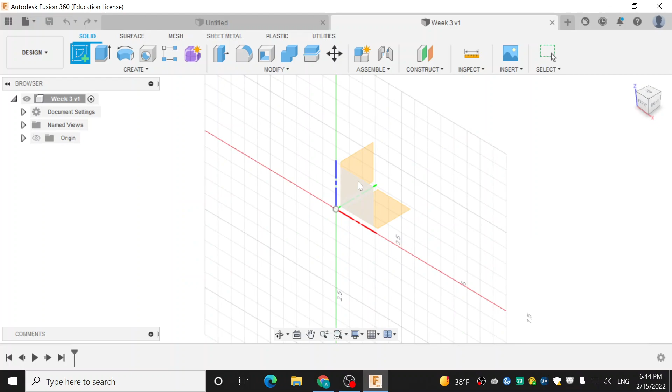I personally don't find that it makes too much of a difference where you start, but in terms of following with me, I'm going to choose the plane that's adjacent to the red and green axes.

So here—and slow me down if I'm going too fast. Just raise your hand or ask any of the training leads around you.

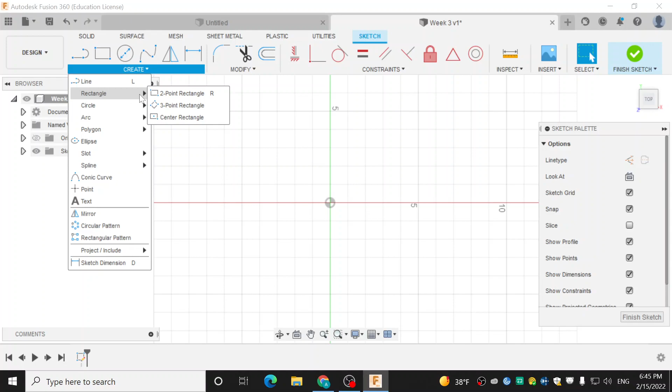So what I'm going to do now is go to the Create bar. I'm going to hit the drop down, go to Rectangle, and we have three different options for a rectangle. If we hover over them, it gives us a little description for what each one does, which can be useful in different projects depending on what you need or prefer.

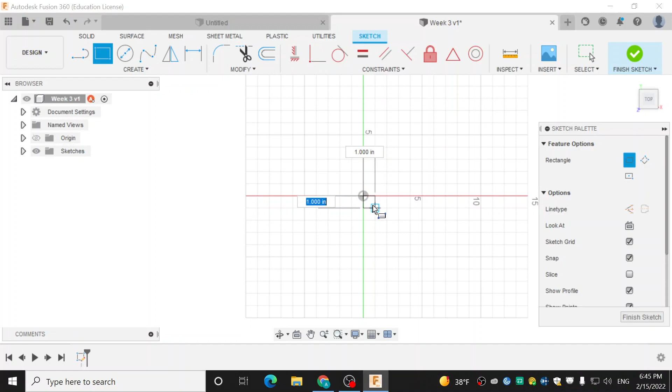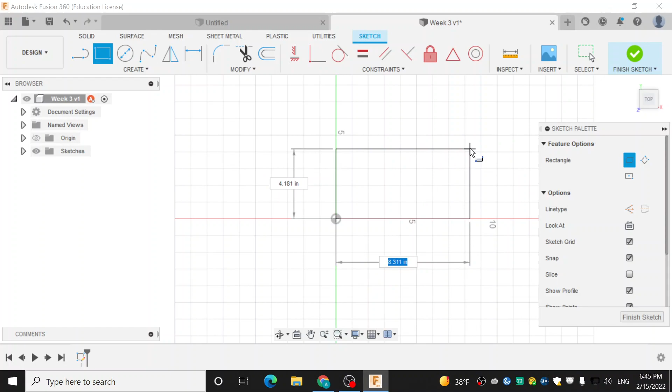I'm just going to do a 2-point rectangle, and go to the origin here. I'm going to place the first corner, and as you can see, we've got two different dimensions, a width and a length. Whatever my blue text is, that's the dimension I'm editing. So as you can see, we're editing the length now. I'm going to say that length should be 3 inches.

Oh, I forgot to mention this, but I will now. If you want to change your units, hit the drop down on Document Settings, hit Active Units, and if you're in millimeters, which I know some of you might be, you can switch to inches and set it as default if you prefer. Forgot to mention that, I apologize.

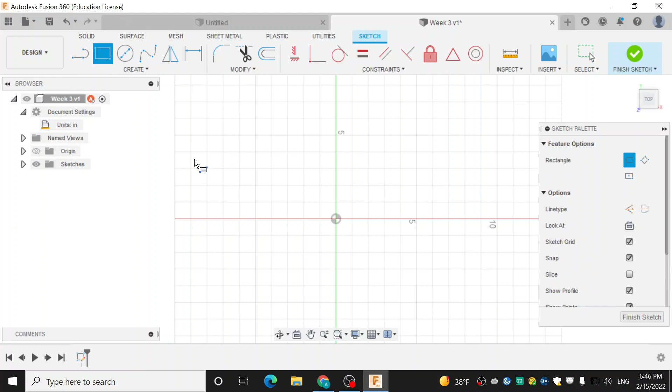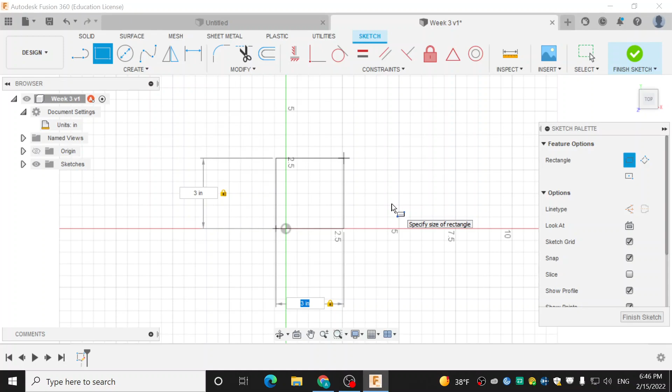Okay, so where were we? We're going to make our rectangle, a 3 inch by 3 inch square. You can tab over on your dimensions and it'll lock it in place. Once both of my dimensions are locked, I'm just going to hit enter, and it'll create a 3 inch by 3 inch square.

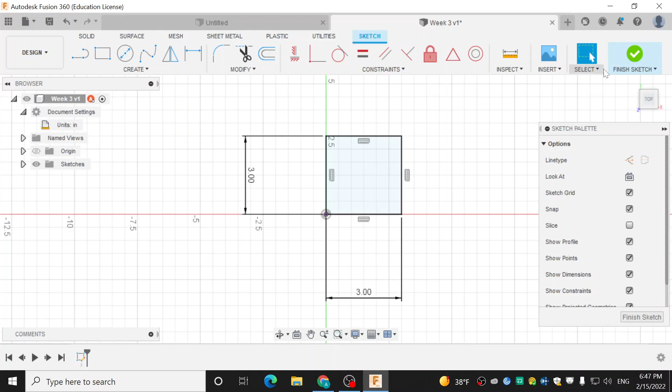All right, so now that that's done, I'm going to hit Finish Sketch, and get it to a position where I can extrude it with ease. You can use this little cube up here and turn it, or if you're on a mouse, hold shift and the middle mouse button to rotate it that way as well—whichever helps you control it best.

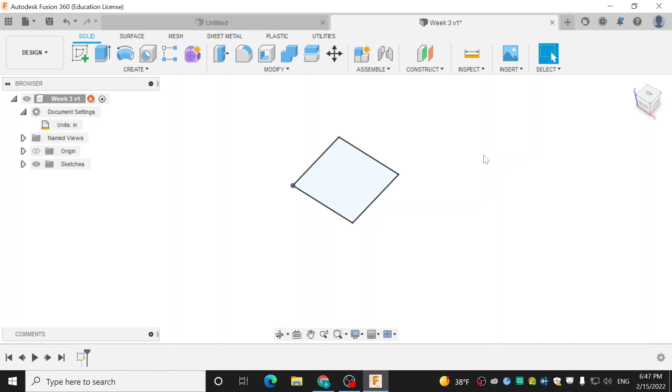So what I'm going to do is go back up to the Create tab and hit Extrude. As we can see, it gives us a little description for what it does—it's just going to allow us to give a third dimension to our sketch.

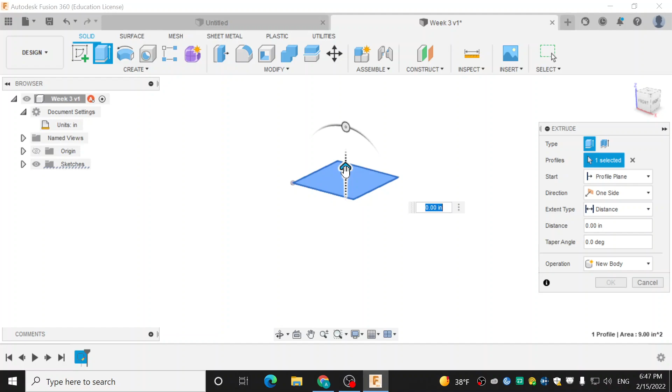So what I can do is drag my cube up or down, depending on where I want to extrude it. I'm going to drag this cube up 3 inches.

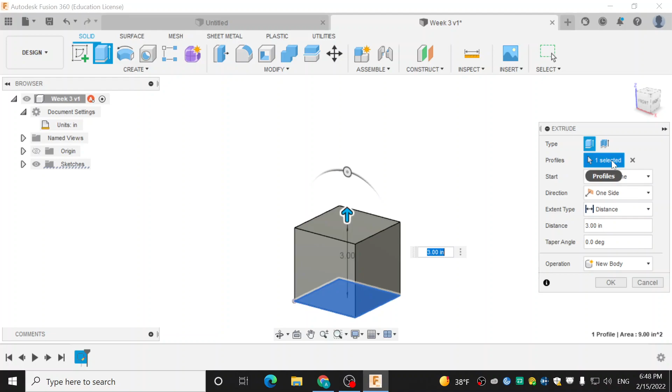For now, the default settings are fine. We're creating a new body, and everything looks good, so none of the default settings have to be changed. Once that's done, hit OK. Now we've got our nice cube.

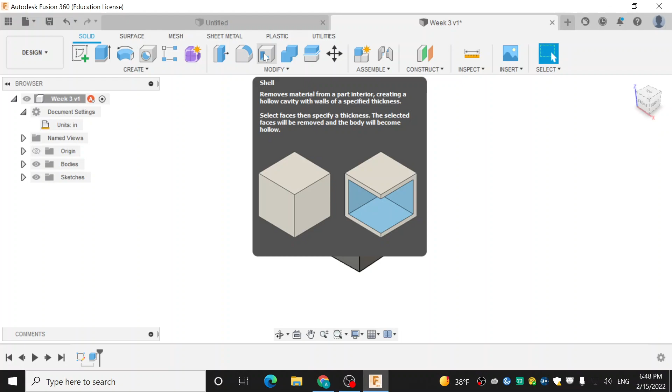So now we're going to go into one of the two tools we're going to learn today: shell. If we go up to the modify section of the toolbar, you can hover over the shell tool and get a description of what it does. It's going to hollow out our piece from any side that we give it.

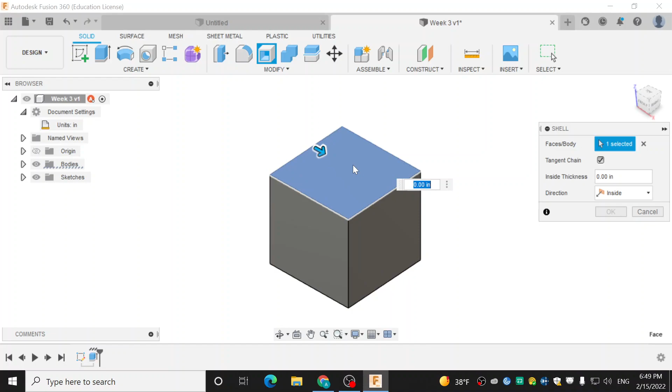We can hit shell and we're prompted by the program to give it a face, so I'm going to hit this top face up here. Now I can drag my arrow inwards or outwards and make the border around this cube thicker or thinner, depending on how I feel like.

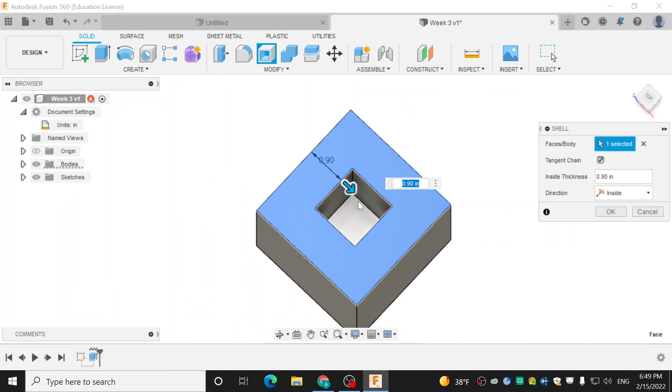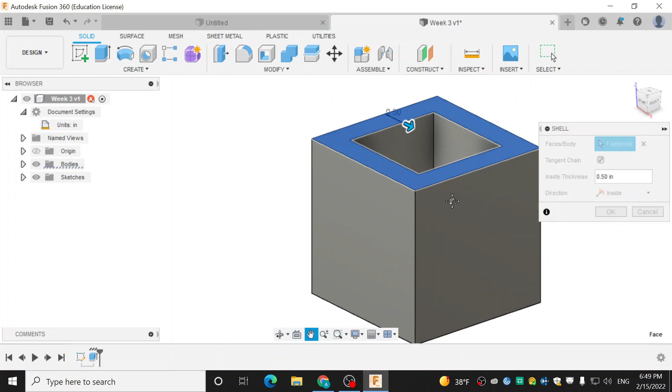If you zoom out, your units, which you can change, grow a little bigger. If you zoom in, the increments are a little smaller. So what I'm going to do is make this 0.5, and then I'm going to hit OK.

So if you ever have a part that you need to hollow out from one side, you'd use the shell tool.

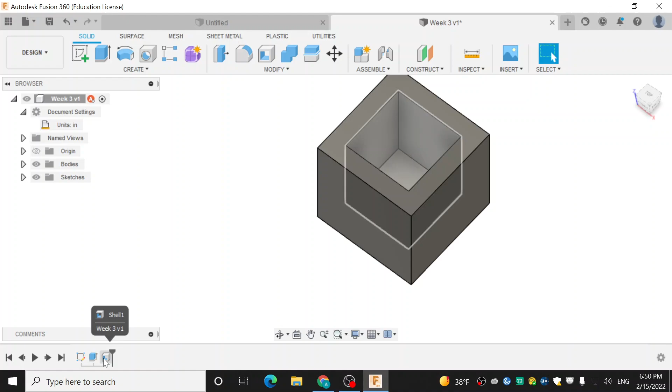And if you want to go back and change anything, you can go to the timeline on the bottom and double click the action that we did. If I want it to be 1 inch instead, I can change it there. So that's a useful thing to note.

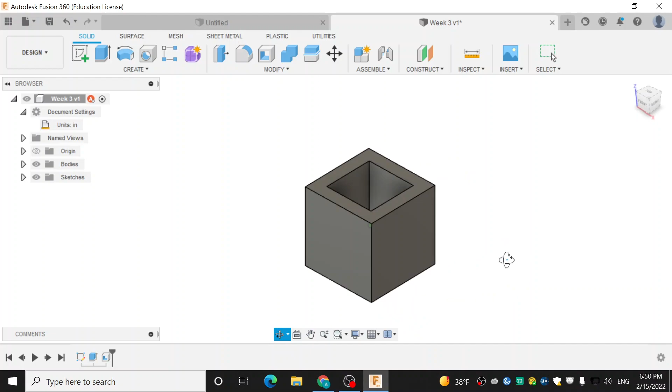So that's it for the shell tool. Now we're going to learn how to use the sweep tool. So flip your cube so that we can see the unshelled face on top.

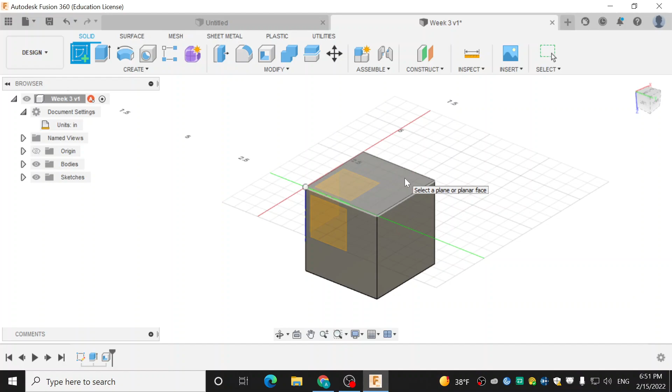We're going to be creating a new sketch on this face. So I'm going to go up to create, hit create sketch. I could choose one of these axes, but I'm just going to choose this face.

So I'm going to go up to the create section again, create a center diameter circle. If you hover over your face, you can see it snaps you to any one of the middle axes of this square face that we have. I'm going to try and find the center.

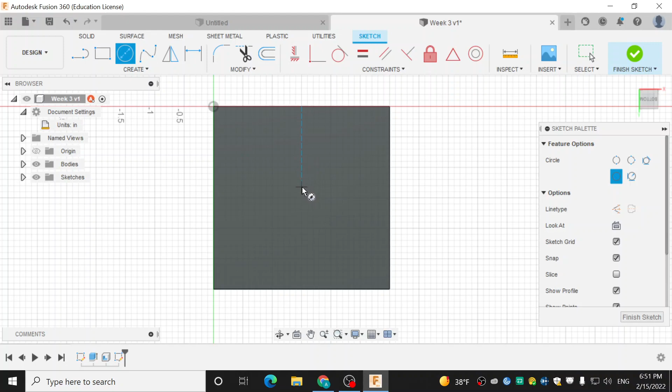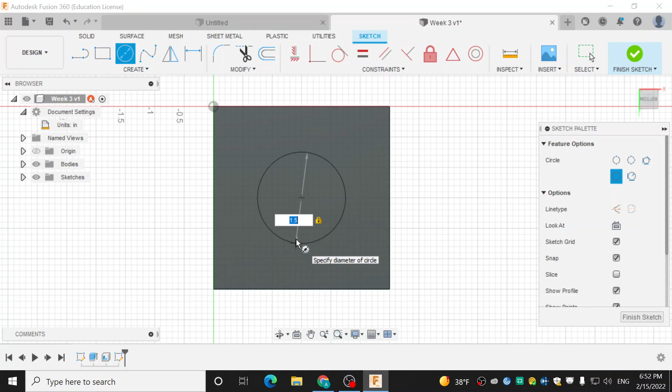Once you find your center, hit your center place point there, and we're going to make a circle, maybe 1.5 inches. My text was highlighted blue, so I can change that to whatever I want, and I can hit enter, and it'll create a circle of 1.5 inches in diameter.

So now once that's done, I'm going to hit finish sketch.

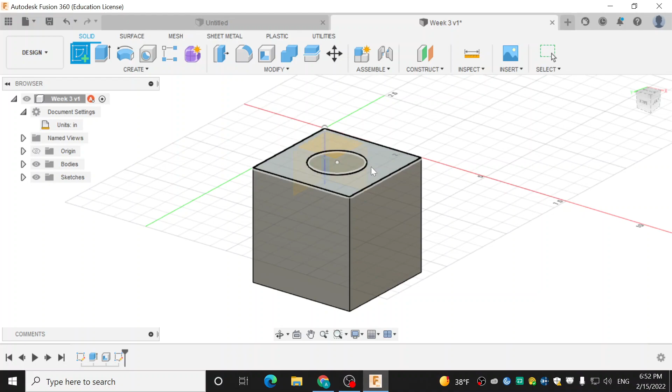Now I'm going to create a new sketch on any one of these sides that are perpendicular to the face of this circle. This is where we're going to create the line path for which the circle can sweep. Any one of these perpendicular sides works, so I'm going to choose this one.

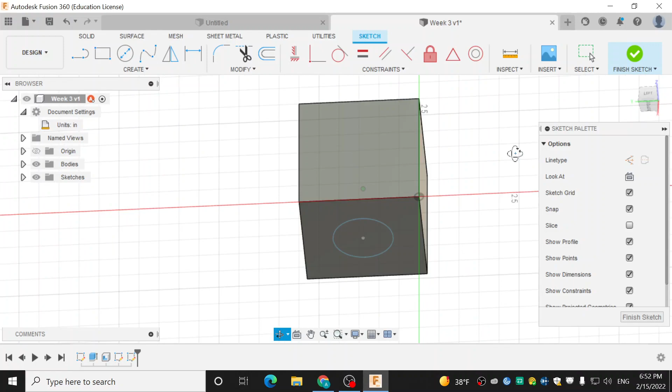We can move our view cube in the sketch too. I'm going to move it so I can better see what I'm doing. You can also hit any one of these designated sections on the view cube, and it'll automatically snap you to that point.

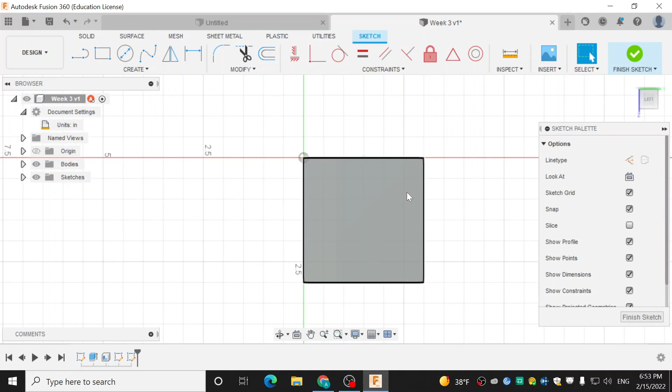What I want to do is make it so that the circle we had up here is on top, and we can highlight over it when we drag over this edge.

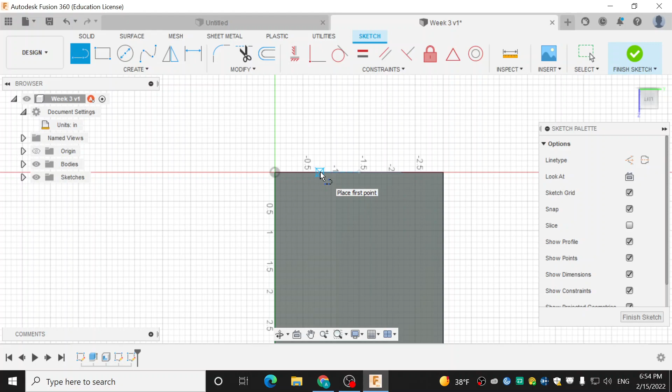So once we identify what side we want to work on, I'm going to go up to the create section and hit line. I am just going to draw some segments starting from any one of the edges here, and it'll automatically snap you to that point as designated by the blue box with the cross in the middle. Once I find that, I'm going to just start creating some segments.

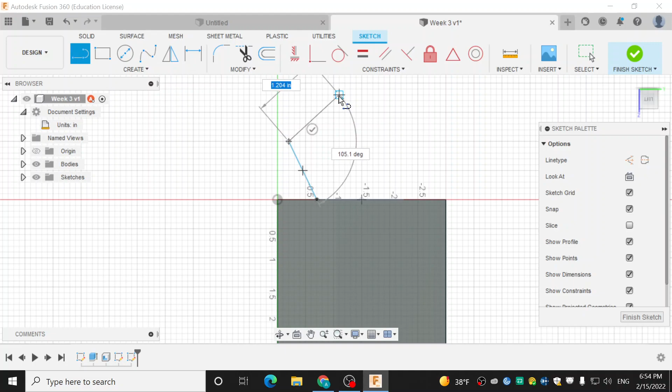So just creating some lines, and the idea here is that the circle that we had on top will follow this path that we have up here in our sweep. Once you have that final line drawn, you can hit escape, enter, and it'll finish that tool that you're using.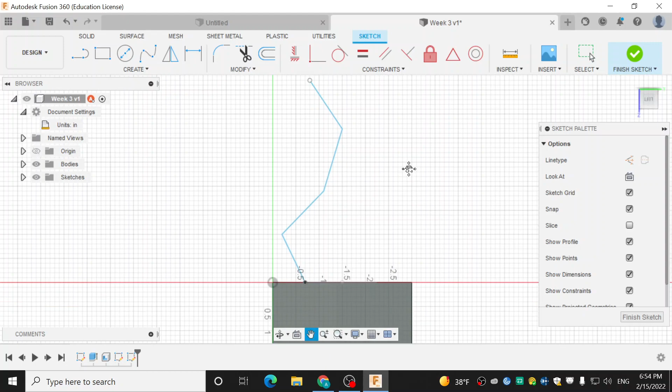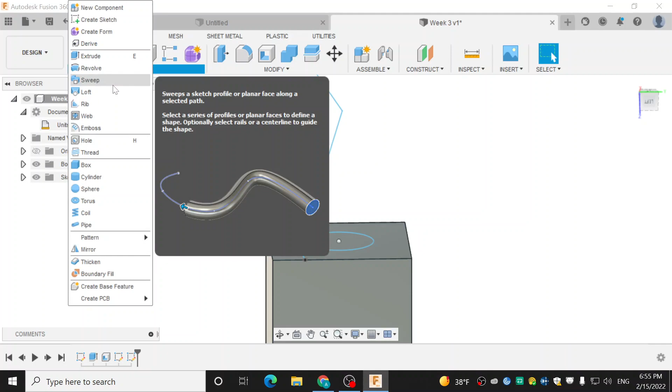Once that happens, you can go finish sketch, and we can go to modify... create, my apologies, it's in create. Thank you, Jordan. We can go to create, and we can hit our sweep tool.

Now we're prompted with clicking a profile, which is essentially just the 2D sketch that you want to sweep across the path. We want to sweep the circle that we drew on top. So I'm going to hit profile, and I'm going to hit that circle.

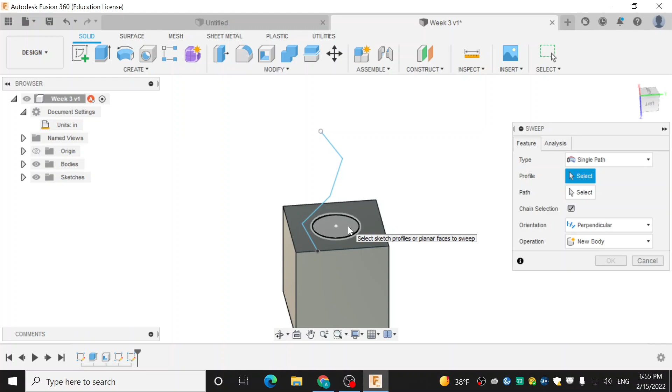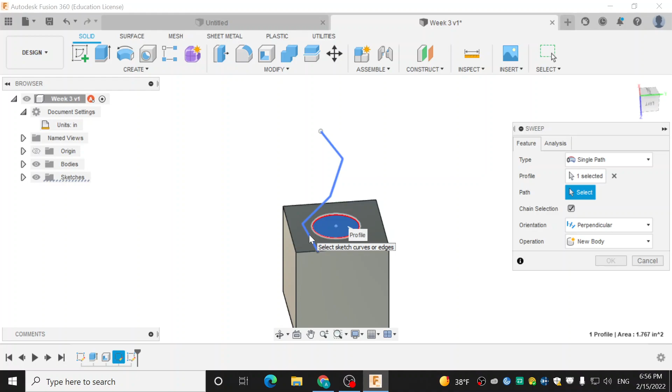Now I'm going to go over to the path button and click that, and now we are choosing the path for which our circle can sweep on. So what I'm going to do is I'm going to hover over our little path here and click that. And as we will see, it'll create segments of our circle all the way up the path.

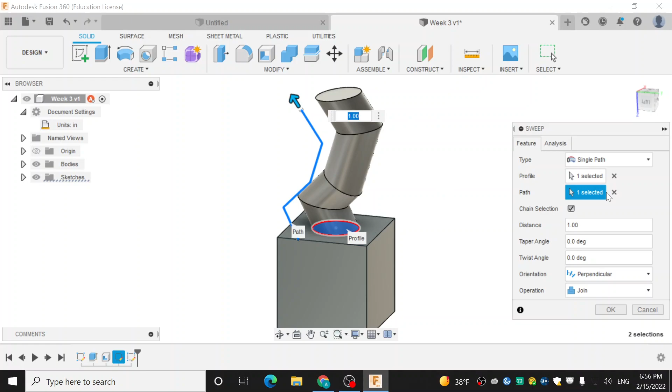Why didn't you choose the center of the circle to draw the path? So when we select a profile, we are just selecting a 2D sketch. I can select the center of the circle.

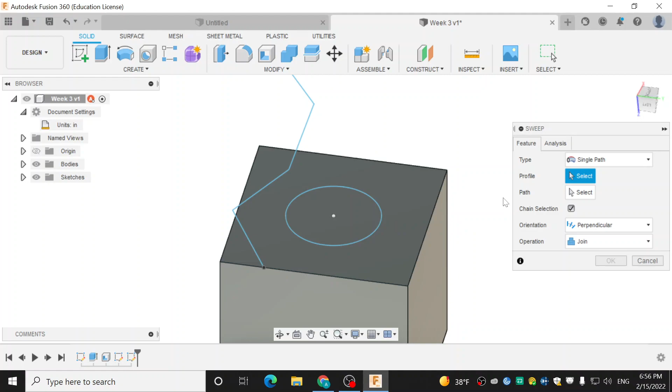Actually, why didn't you draw the path from the center? Oh, why didn't I? You can, I'm just demonstrating - it's all up to you when you use this tool. So if I go back to the sketch where I made this, I can move this bottom line and just move it to the center. It all depends on what you want from your project. Some cases you might not want to have it in the center, some cases you might.

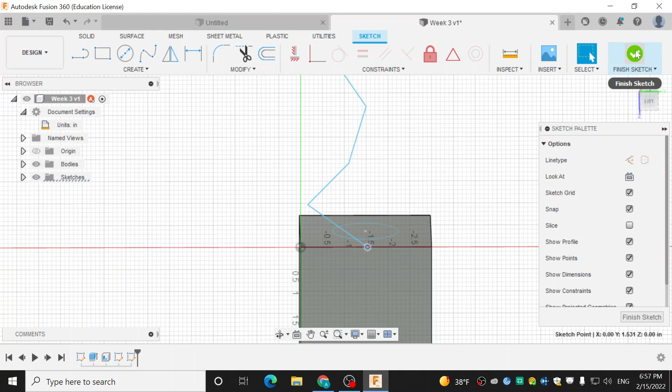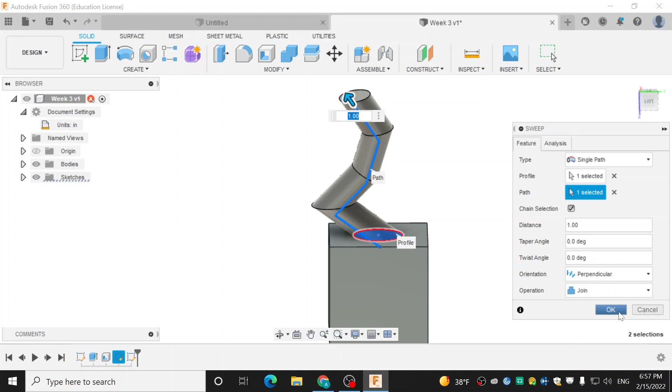Anyway, you can finish the sketch, and I can just repeat the sweep along the path there. And now it'll just start it from the center, right? And we can hit OK once we have our sweep set. And now we have our beautiful... whatever.

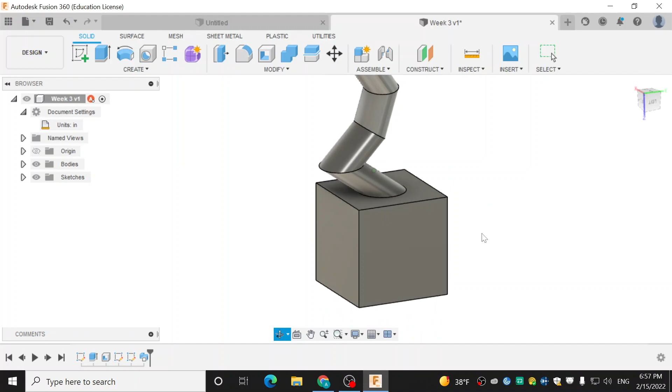I imagined this to be a little hook hand for some Lego pirate. Just to justify that I made something creative.

And we don't even have to use - actually I'll wait for these guys to get caught up first. I was going to show them the arc, yeah, but I was just making sure.

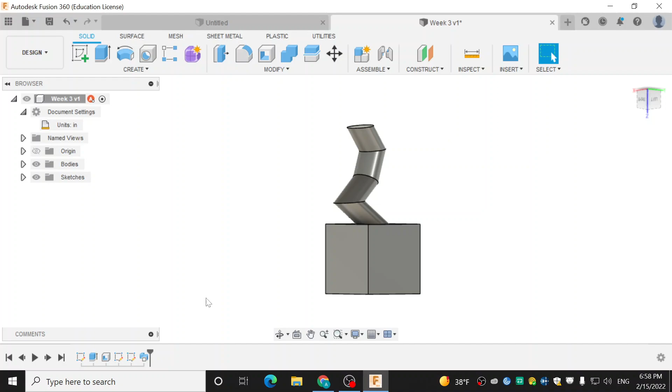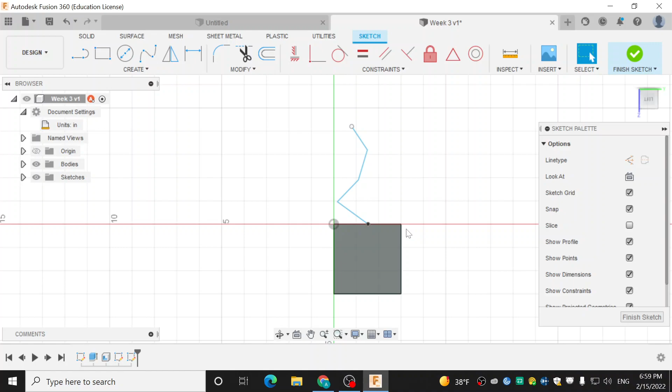Okay, so you don't even have to use the line tool to draw your sweep path. What I'm going to do is I'm going to delete the previous sweep just so that I can start anew. And I'm going to double click the sketch that I made in the timeline and reorient it. And I'm going to delete this line. Instead, I'm going to use an arc.

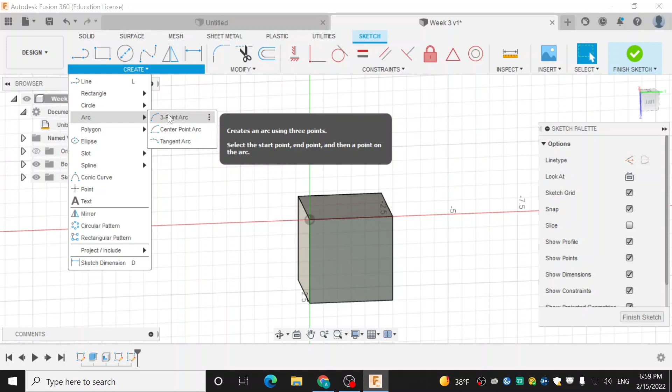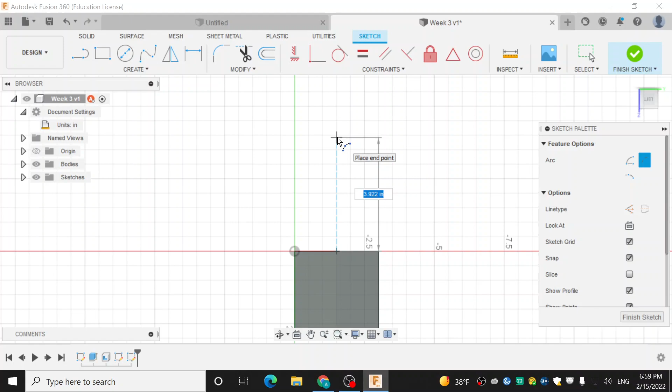So what I want to do is I want to go to Create, go to Arc, and I'm going to choose a 3-point arc. Now, if I realign myself with the sketch, I can start my arc on any one of these points on the edge. I'll place the first point here, and I want to place the length of the arc from one end to the other - maybe 3 inches out. And I'll angle it like this.

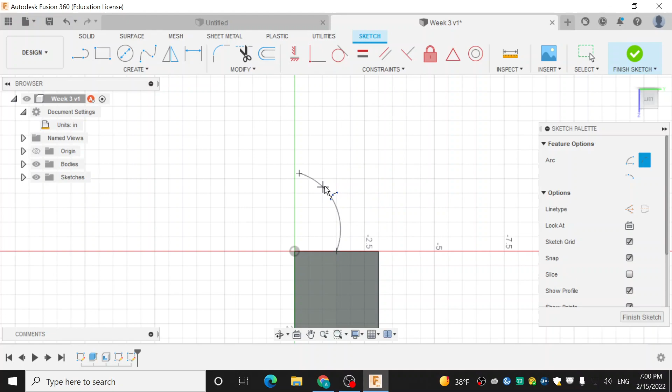And once you set that angle, you're going to be charged with drawing the curvature of the arc. So I'm going to just make it not too much. I hope it picked it up.

Anybody want me to run over the arc drawing thing again? Just let me know. Okay.

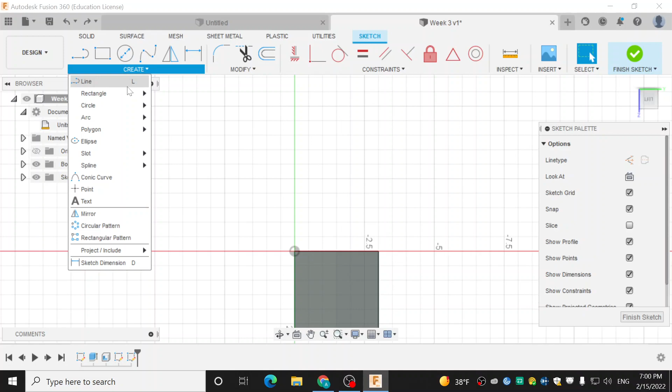So I'm going to Control Z. I'm going to go to Create, go to Arc, and hit 3-point arc. Then, like my line, I'm going to start the first point on the edge of the cube. The way Fusion requires you to draw this arc is that it requires you to draw the first point, the end point, and then the angle, and then it allows you to change the curvature of the arc after you have those 3 points set.

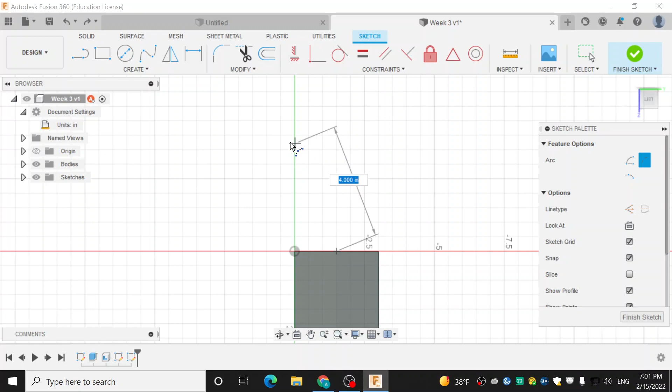So in this case, I don't really care what my length of the arc is in terms of the endpoints, just the distance between the 2 points. So I'm just going to click anywhere. And once I do, I can change the curvature of the arc. So I won't make it too unwieldy, but something like that.

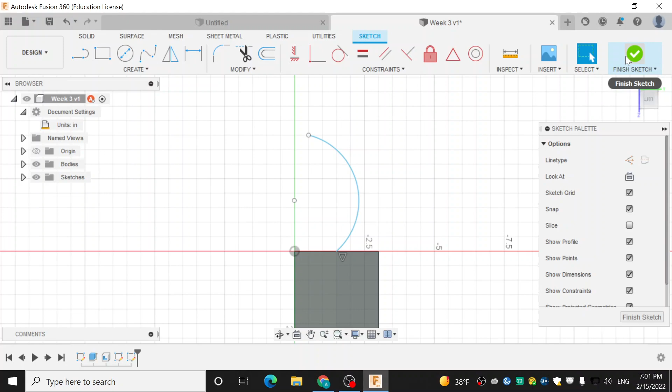Once I have that, I'm going to hit escape just so that I can leave the arc drawing. And I'm going to hit finish sketch. Sorry, I just need to redo it - same process.

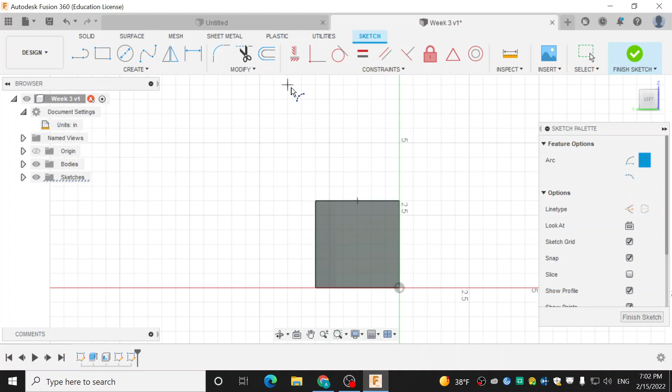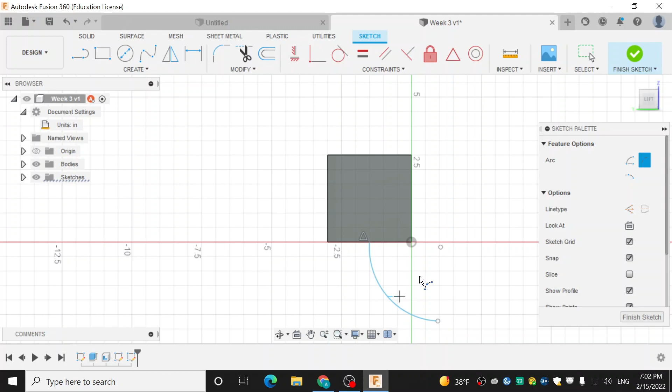They disappeared? Yeah, so what you want to do is - I'm just going to recreate it. I don't know why it disappears after you delete the feature. Oh, it just hides the sketch, it doesn't actually delete it. If you go to the drop down for sketches and you just click the eyeball on the left, that will fix it.

You can tell everyone that - yeah, if anyone has had their sketch disappear, I didn't realize that it would do that. If you go to the sketch drop down on the left side, you can unhide any of the sketches that you made previously. I think that might have tripped some of you up. I apologize for that.

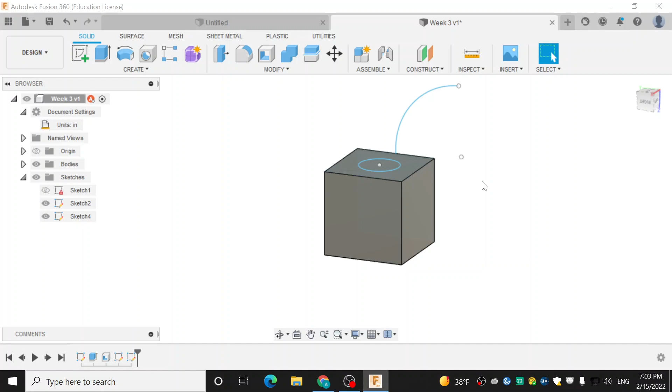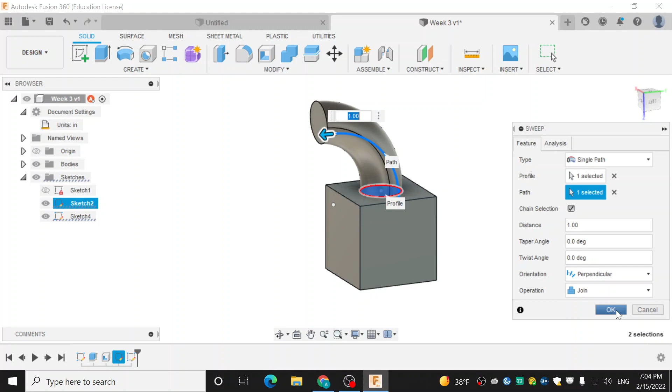We can do something similar to before. We go to create, go back to our sweep, and do the same thing, but now our path is this arced line instead of our segmented line from before. Hit OK on that, and we have a lot smoother of a hook handle.

Yeah, what's up? Got it?

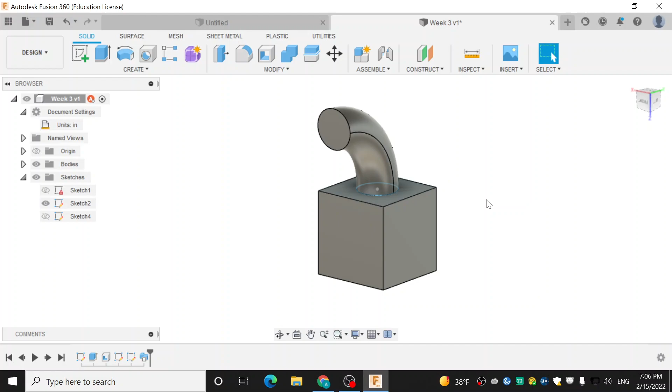So as we can see, it's a pretty useful tool if you want to make any type of sweep in any shape you want. We saw two different versions. And what if I want to keep both of those versions, right? Or not necessarily keep, but have those on file. So what I can do, I know there's been a lot of deleting, but I'm gonna just delete this sweep over here to where it's just my circle again.

I'm actually gonna delete this sketch as well. So if I have this base cube, I can save this project as a starting point and just keep creating new projects that derive from this first step here.

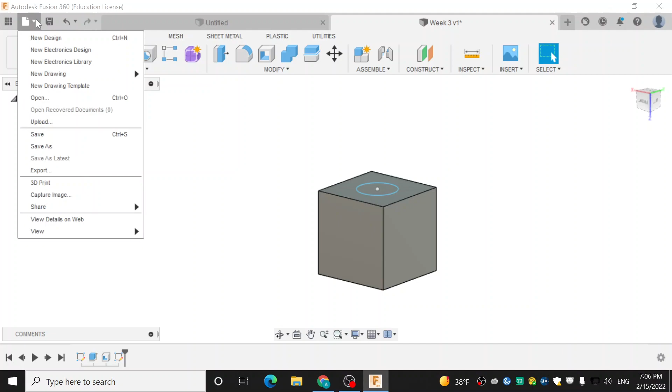So what I'm going to do is go back to File, and I'm just going to do Save As, and maybe we're going to say week 3 first. Save it in there.

And if we go to Show Data Panel, and we go to our week 3 folder, we can see that we have our week 3 and week 3 first projects here. So what I can do is open this one, and I can just keep editing on top of this and changing it, by hitting Save As every time.

Another thing I want to mention is if you're ever working on a project and you've been saving it a bunch, and let's say you totally mess something up and want to go back, the little V1 here means that this is version 1. You can always click this, and it'll give you a list of all your previous saves. So if you ever want to go back to some previous version of the file, you can often access the file history.

Now I can just make whatever changes I want to this block. So it's going to be pretty useful to have a template if you're working on multiple different iterations of a part, to just have this as a starting point and be able to change and design without changing the base part that you're going to use to iterate off of.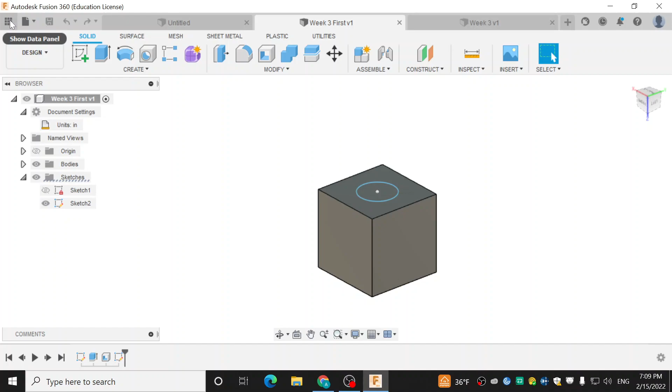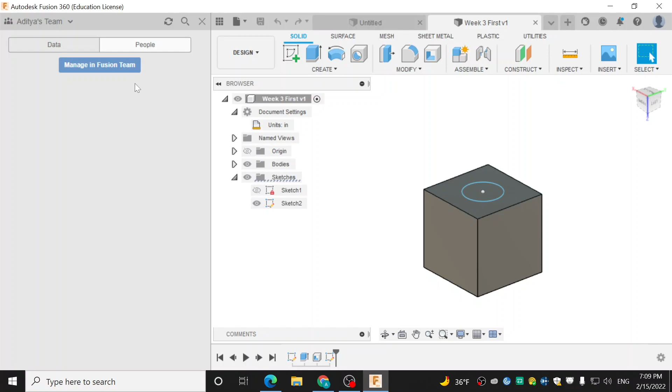I'm going to go to Show Data Panel, and go to People. You just click Manage. I'm going to hit Manage Fusion and Manage in Fusion Team, and it's going to take me to the browser. Try it more, it might be loading, maybe it'll take a while. You could also do data, right-click on it, it's Internet Explorer, okay.

So I can add members, manage, invite. I can just enter any of their emails in here. Whoever I add on this project will now be able to access it, the same part, and be able to make edits to it, and it'll all be saved in the cloud. So when someone makes an edit somewhere, it'll be reflected in that folder. Got it, I'm going to hit invite.

Now, Jordan has access to modify my cube at his will, which is really exciting. Yes.

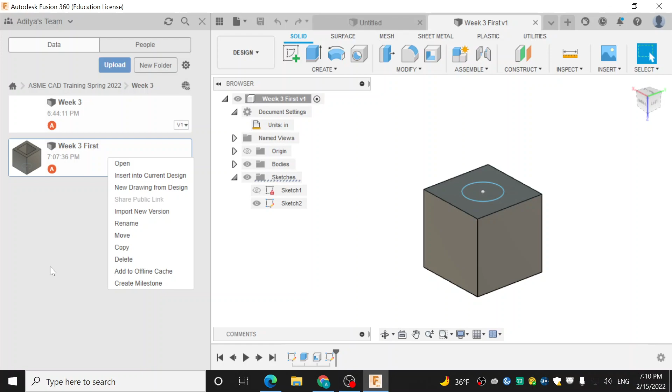And so I'm going to just show you this kind of collaboration in action. I'm going to sign into my other Fusion account.

I think. Do you share with yourself? Do you share with yourself? Yeah.

So I made this, let's back up. Made a project yesterday, a little Tin Man, using the sweep feature. Now, say I want to, this is for a big project in one of my classes, maybe CGT, we'll see.

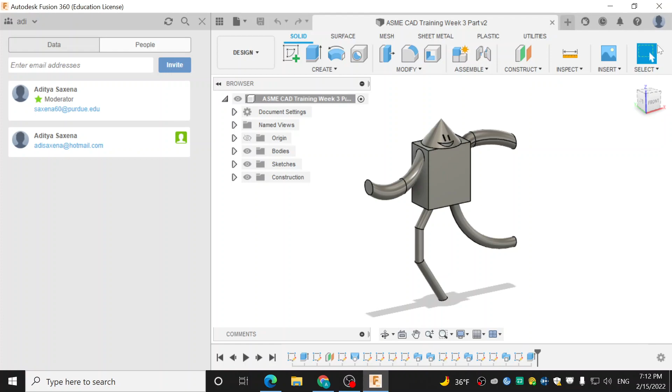So I want to share this with my friend, my lab partner. There's another option: if you hit people, you can directly invite emails from here, so I can add my other account there, and I can hit invite. And so now, that other account I was working on will now be able to access Tin Man over here and be able to modify it. So yeah, I'm gonna just log back into my other one.

So if you look at the top right, when you hit the data panel, you can see that I'm now a member of 2 different teams. If I go and hit the other team that I was invited to, I now have access

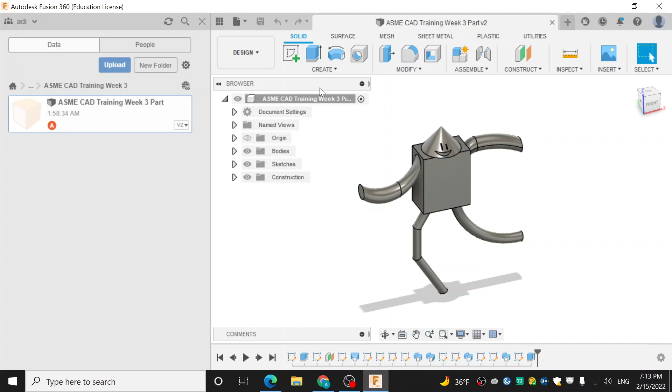To Tin Man. Now I can delete him if I want to. I probably will, because this will not get a passing grade. But I could. I can now, so you see it's like, essentially it's like the Google Drive of CAD.

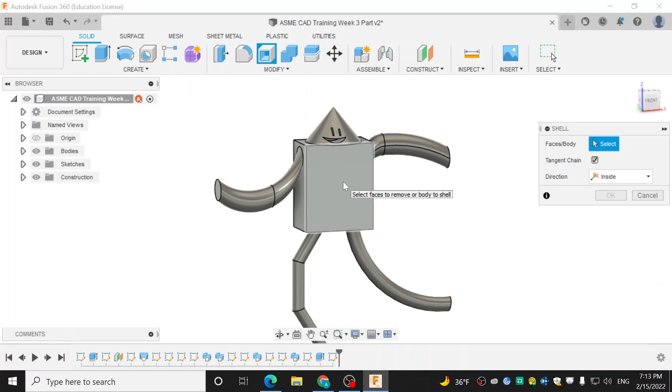Okay, so what we're gonna do is we're gonna make a sketch. Oh no, we're not gonna do this, sorry. We're just gonna use the shell tool here. We're gonna put a little indent in Tin Man's stomach here. Oh, that's his leg. Never mind. You see what I'm going with here? I'm just trying to be funny.

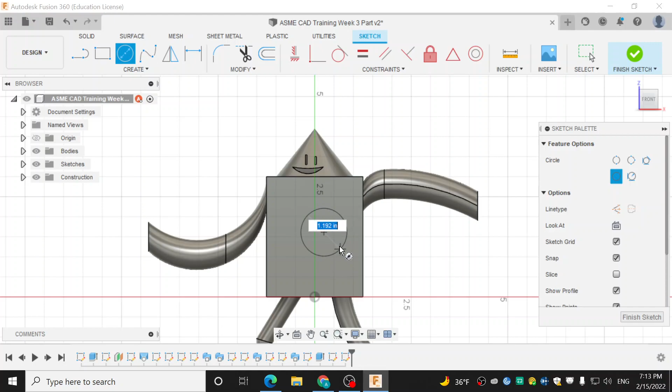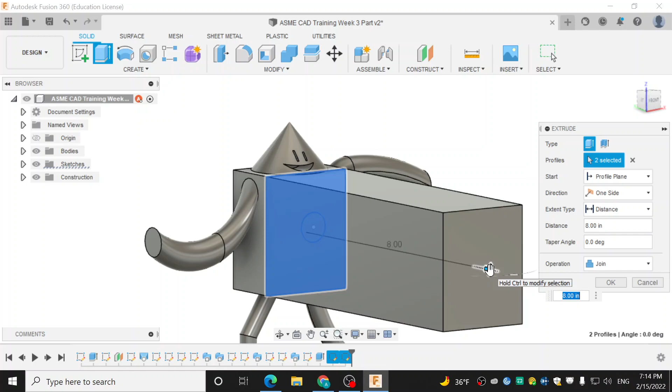You just do a rectangle and make extrude. I'm just gonna make a little badge for him. You can do whatever. I'll just make him have this, I don't know, the third arm here. Hold on now. I can make him a little wider.

The point is, these changes will be reflected on both users' ends, and this is super helpful if you're working on a CAD file with someone who's not in your immediate vicinity. If you do have the design projects, you can work on the same part, same project, all at once from different separate computers, which is very useful.

This is also specifically a great feature of Fusion, because if you're using NX, which is what you'll have to use with CGT, all this file sharing is a total pain. So one of the main advantages of Fusion is that you can work on teams and stuff.

So does this update in real time, or do you have to save it? Yeah, so actually, if you're sending individual files, oftentimes you'll have to save. But if you do a special type of drive system, I think there is a way to get it to change in real time for the most part. But that's like, I think they still have beta kind of testing for that. So it's not 100% in the program yet.

You also can't work on the same part at the exact same time as someone else, for obvious reasons. So if you're in a file that someone else is also working on, you'll start getting errors and stuff. So for the most part, if you're on a team, you just say, I'm going to work on this right now. You save it, and then they can start working on it after.

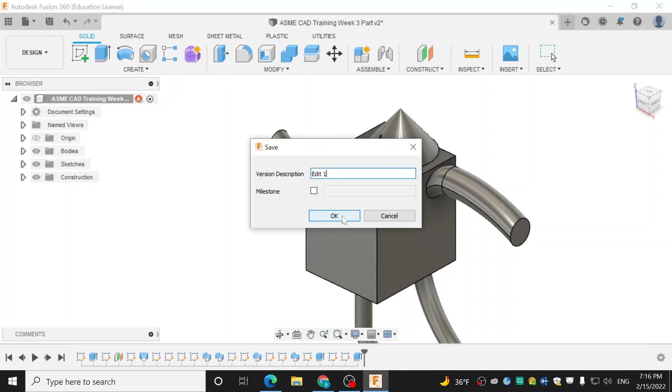Yes, and I can name the specific edits that I'm making. So here I just named it edit 1, but when you're working with a team, you can be more descriptive, just so that they know what you did to the previous part. And this is what Jason was talking about, you can go back and see what kind of edits people have made to the project, the part, and just view it. So it's very intuitive.

You go into the drop down, and then just version. So now here it says version 2 or version 3. And we can see the different edits made by the different people. Those would be different people, but it's just me. But yeah, that's something that's very intuitive to Fusion.

I know I learned CAD with Inventor, and this was definitely not in there. So this is something good about Fusion. Yes, that's the whole reason we swapped from Inventor in the first place when I started. Well, we were in SolidWorks for this, but in high school.

So it's great for collaborating, which is what hopefully a lot of you guys are going to be doing, or are doing, in the design teams. So it's good to know.

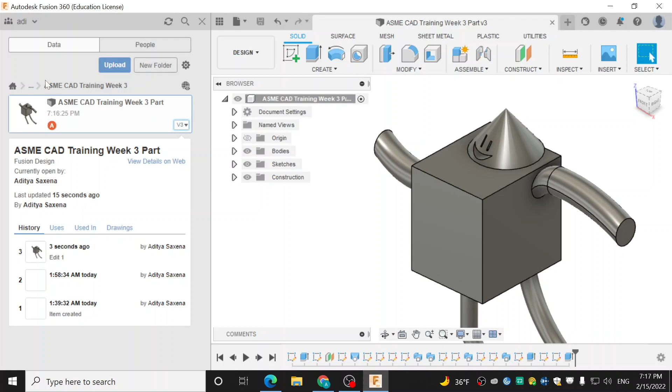Now, I mean, I could go back to the other account and show you that it edited, but I think I'm going to leave it. And so, yeah, that's all I have for today. Does anyone have any questions?

Yeah, so hopefully, now that we've gone through all of the different tools you can use, you guys can start coming up with your own designs and be able to turn them from sketches into fully formed 3D models.